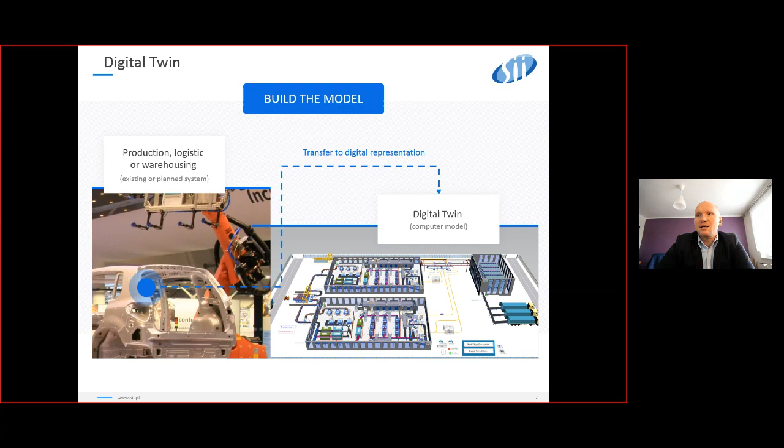What is a digital twin? Digital twin is a computer model which gives us many possibilities and opportunities. It represents an existing factory or plant, including production processes and logistics, or a planned production system in greenfield or brownfield stage. What kind of new possibilities does a digital twin give us?

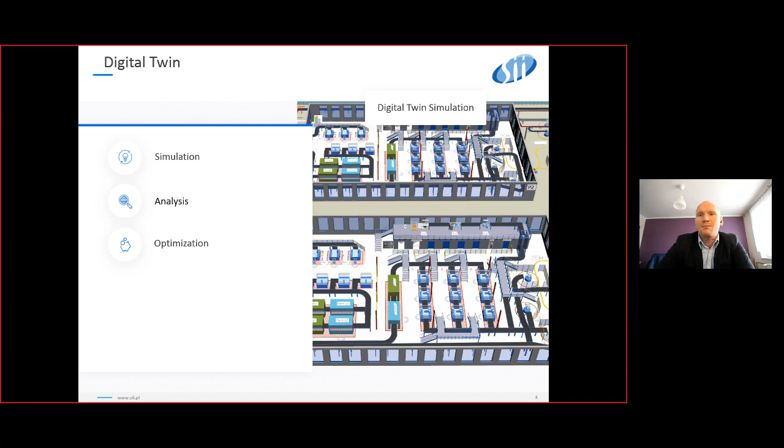Basically, digital twin allows us simulation, and we can make many different scenarios thanks to this. Analysis: we can check the throughput, machine efficiency, and so on. We are able to do optimization with genetic algorithms, for example, or optimization of buffers. We are also able to make nice visualization in 3D or 2D environments. And this is everything in the area of production, logistics, and warehousing.

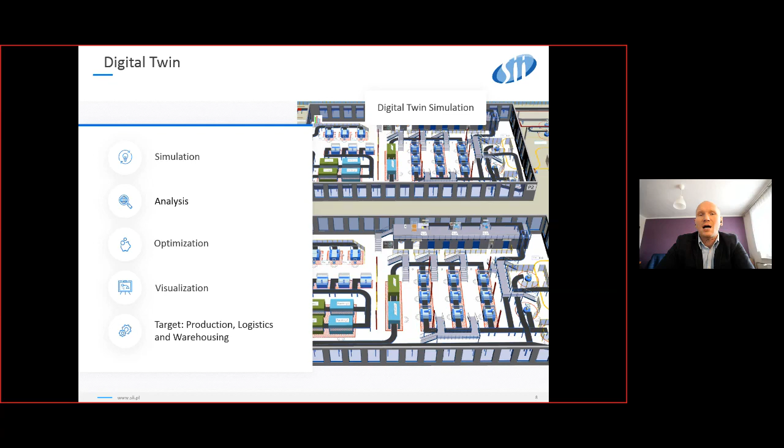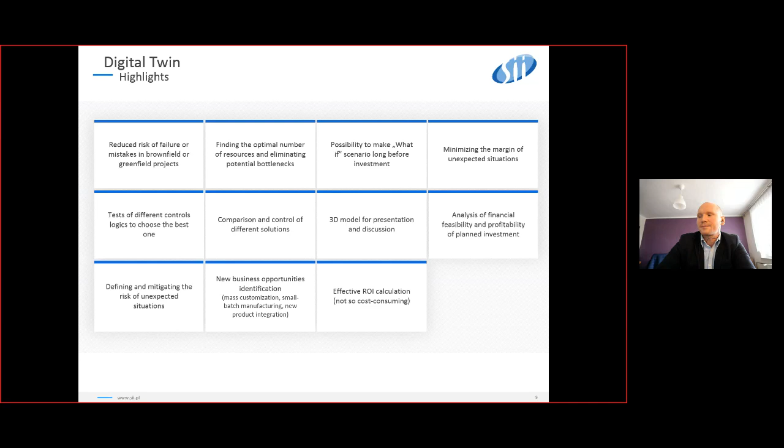Przemek, say a little more about the highlights of the digital twin. Yes, of course, there are lots of different benefits and highlights of digital twin. We've just listed some of them here. Of course, this is not the complete list.

However, we will summarize what we believe is the biggest benefit of digital twin: we are able to make all kinds of analysis based on different kinds of input data. Starting with the most obvious, financial feasibility and profitability of planned investment, all kinds of what-if scenarios, different comparisons of different solutions, products, control logics, and so on.

We can use digital twin as a great tool for minimizing the margin of unexpected situations, as well as mitigating the risk of such situations. And of course, we can make effective return on investment calculation.

However, what is most important is that we can do it before we really put real money on the table and invest a lot into hardware and equipment. And as you will see later in the cases, we can do really great analysis of future investments.

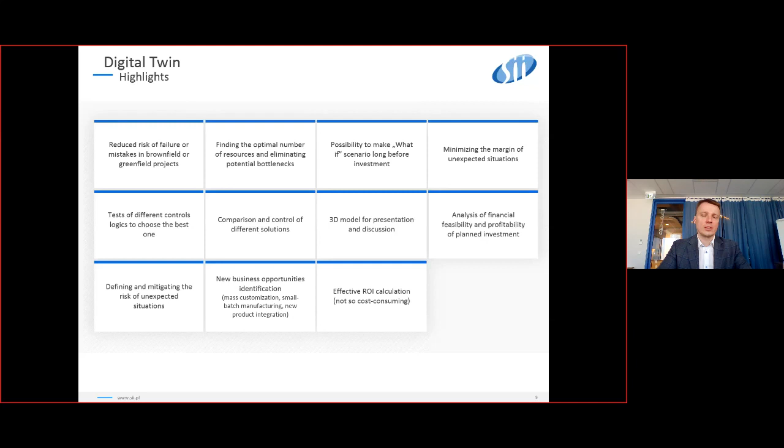So Damian, I give the voice back to you. Thank you, Przemek. So how do we build the model? In the beginning, we need input data. We can collect them for you, or probably you already have that data and can share it with us.

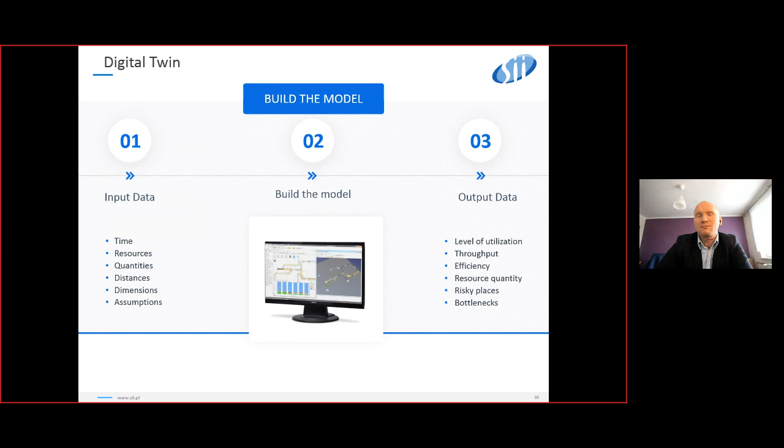If we have input data, then we are ready to build the model, and the model should give us output data, the most interesting KPIs - for example, level of utilization, throughput, or show us where are risky places and bottlenecks. There is much more different benefits, and everything depends on the project and the project goals.

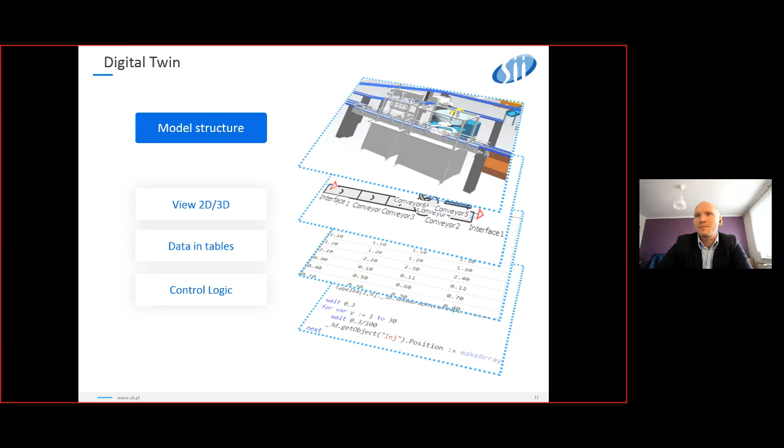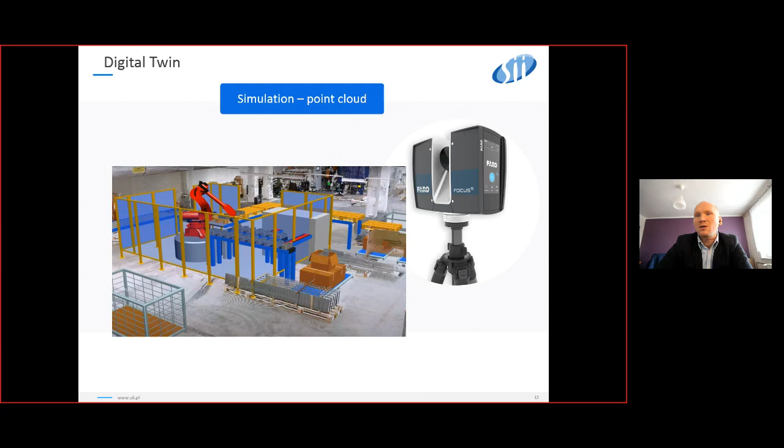We can make simulation in a point cloud if you don't have, for example, a layout or some 3D models. Then we are able to make a 3D dimension point cloud, and in this 3D dimension point cloud make the simulation.

We are also able to create a digital twin for you which will exchange data. It will be possible to import data from databases and send it to some system which may use data from the digital twin. So this data exchange is on two sides.

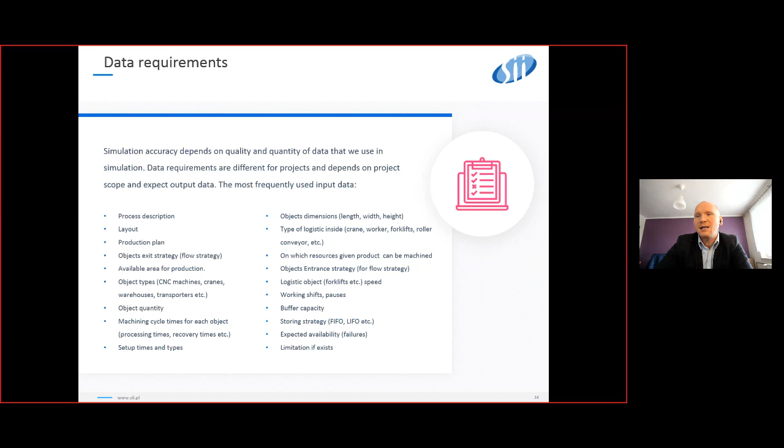Mostly in our projects, we are using input data as you see on the screen. This information is helpful for us in the first stage to make the offer, and after that to make the digital twin for you. You will see some of this data in the next two cases, which I will present for you.

So how does the project implementation look? In the beginning, we need to check your data and make familiarization with your data, learn your processes, check how the process looks. After that, we are ready to prepare an offer for you and make some estimation, and later on prepare the project.

In the end of our project, we will give you the answer for the questions, and we will achieve the goals, and you will be ready to implement those recommendations with a low margin of error.

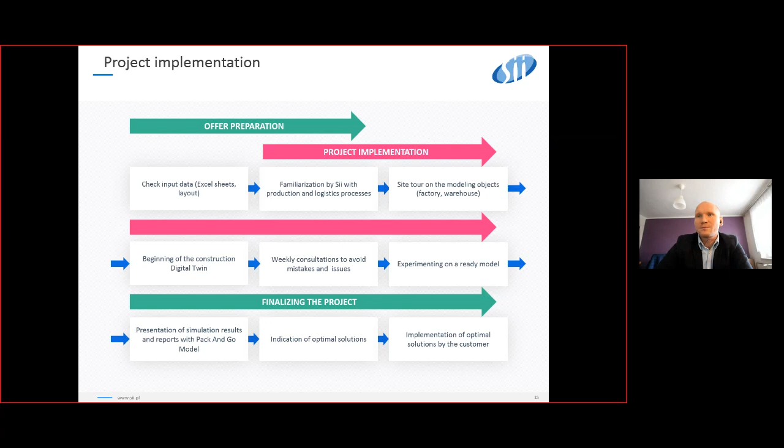Case one, the introduction. Give you, Przemek. Okay, so now we can go to the business case.

The first one we'd like to present is a real life case. It was developed for Kler, one of the biggest furniture manufacturers in Poland. So what was the task?

The task was that there is this factory already operating, and they were planning to change the logistics system in the sewing department. There were several goals defined, and the main one was to compare logistics systems, which I will explain more in a second.

There were some production planning aspects that the customer wanted to analyze. Of course, they wanted to verify different kinds of scenarios, make some experiments according to already simulated data, find the optimal parameters, and recommend the optimal number of devices.

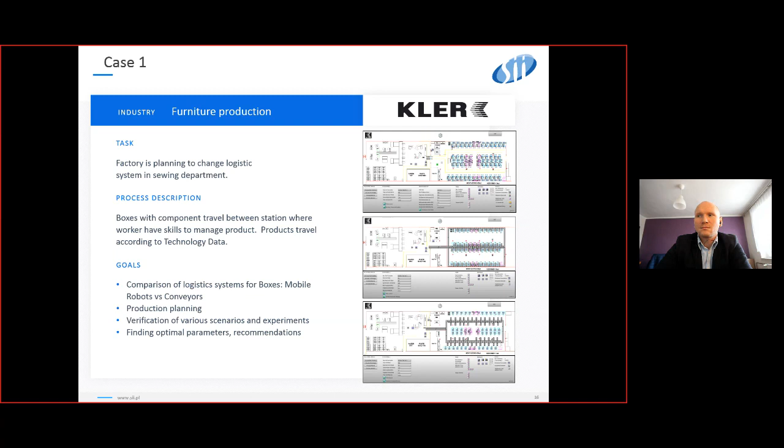The process being analyzed is that product boxes travel between stations where workers have different kinds of skills. This is an important factor because, as you will see during the simulation, the competency matrix was required to be implemented so we would have a realistic simulation of how the workers work.

Also, there was a requirement to integrate technology data. So all the production technology necessary to deliver the products should be input data for the simulation, as well as time scheduling, shift work, and things like that.

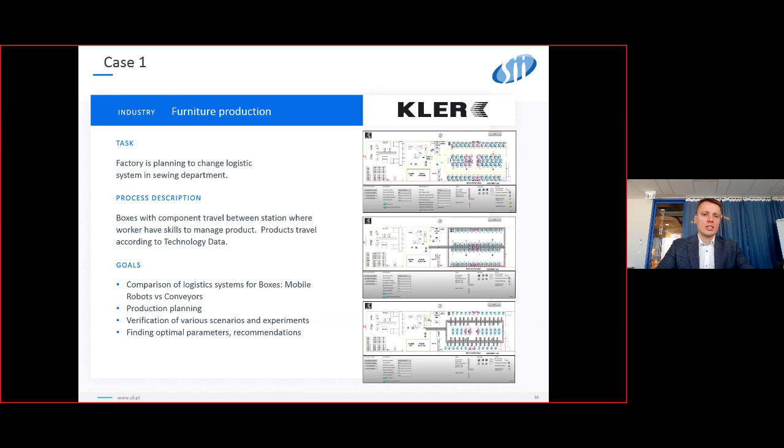So the process and the layout, if we go to the next slide, shows there are material cutting and initial sewing departments where the real process starts, and then the material is transferred to the assembly sewing department and the decorative sewing department.

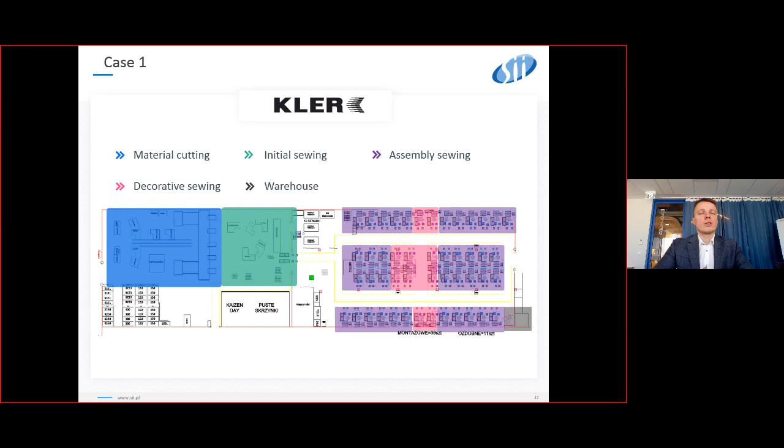As I mentioned, if we go to the next slide, the main goal was to compare three logistics systems. One was based on mobile robots, AGVs, and two others were based on conveyor systems in two different topologies, called Concept 1 and Concept 2.

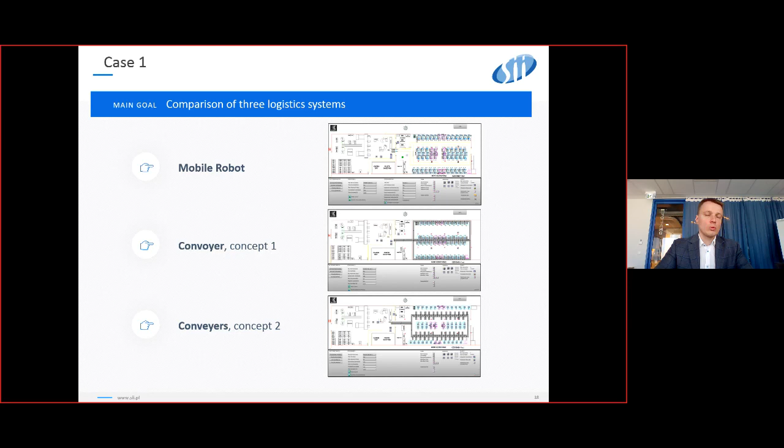So now, Damian, I give you the floor back again to present the simulation. Thank you, Przemek. So now you see the simulation model.

In the bottom of the screen, you see the control part. On the left side, there's a possibility, by clicking the button, to choose input data, which is stored in Excel sheets, but we can also change it and take this data from databases or your systems. In this example, we are based on Excel sheets.

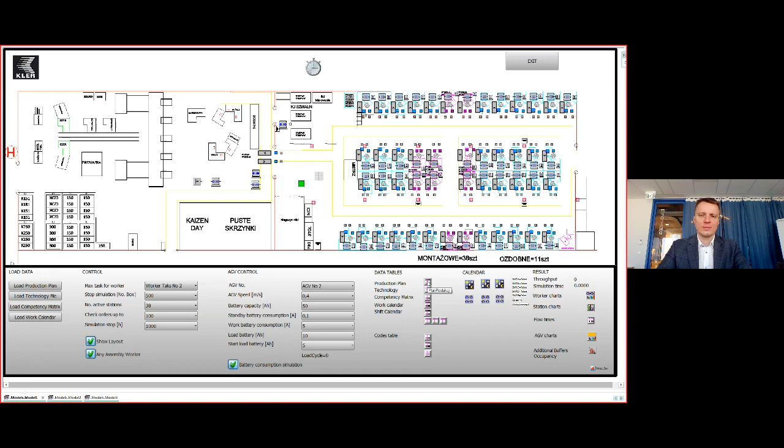After that, we are able to load the production plan, technology file, competency matrix, and shift calendar, and those data are stored in data tables. For example, this is the production plan - one month production plan includes more than 2,000 orders. There is also technology with the routing of the product and the cycle time for the product.

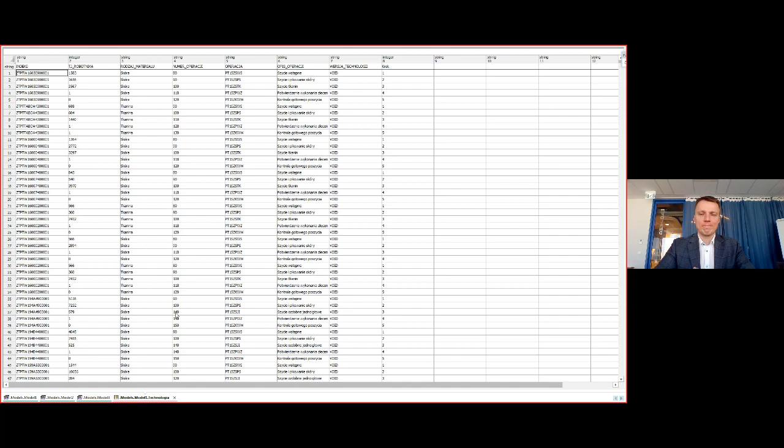There is also the competency matrix, which tells us which worker has which competency. When it's 1, it means the worker has competency to work with some kind of product. So if worker 2 doesn't have a 1 in a cell, it means they cannot handle or manage this product because they don't have the skills to work with it.

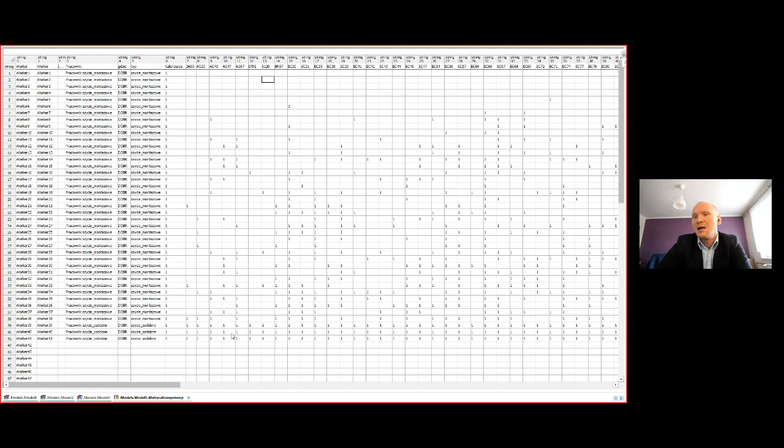At the top, we've got the workers with lower skills. At the bottom, we've got the workers who are most qualified and very flexible. So we start by giving tasks to the workers with lower skill, and after that we go to the bottom of this table.

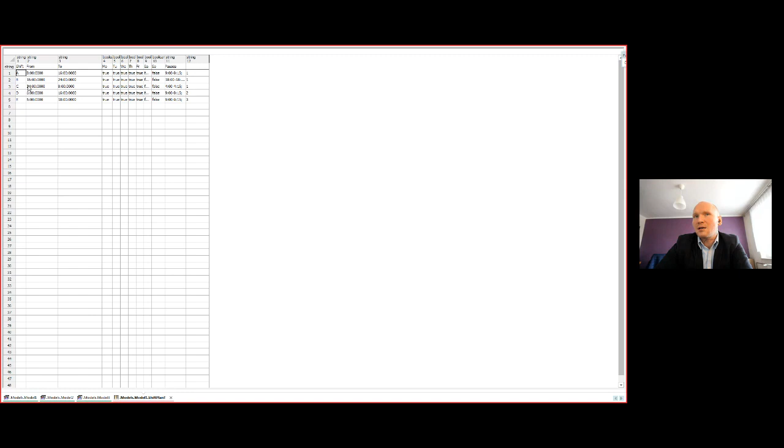We've got some information about the shift calendar, so we can run the simulation in different shifts. It's up to the person making the simulation and experiment to choose which calendar will run.

Besides that, we've got additional options - we can send two orders, for example, to one worker. Of course this is a drop-down list, so it's possible to change it. We can also stop the simulation after a few hundred orders.

We are also able to deactivate some stations. Now we've got 38 of them, but we can choose less than 38. We are checking the orders from the production plan, and we can also change the figure over there.

In this version, we also have the control panel for AGV, where we can choose the number of AGVs, which is very important for us, the average speed, and battery consumption and battery parameters, which we can also change depending on the producer and our assumptions in this area.

The last part of the control panel is results, and the most important for us is throughput and simulation time. Throughput shows how many we produce, and simulation time shows how long it takes to produce the throughput.

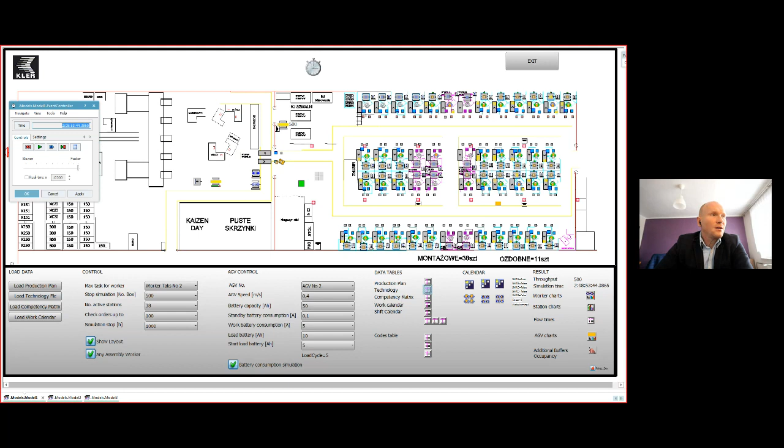I will save it to an Excel sheet to compare this data with other versions of this model.

So now I will run the second version where we have conveyors. I will run it at full speed. And after a while I have the time and the throughput, so I will store it in the Excel sheet.

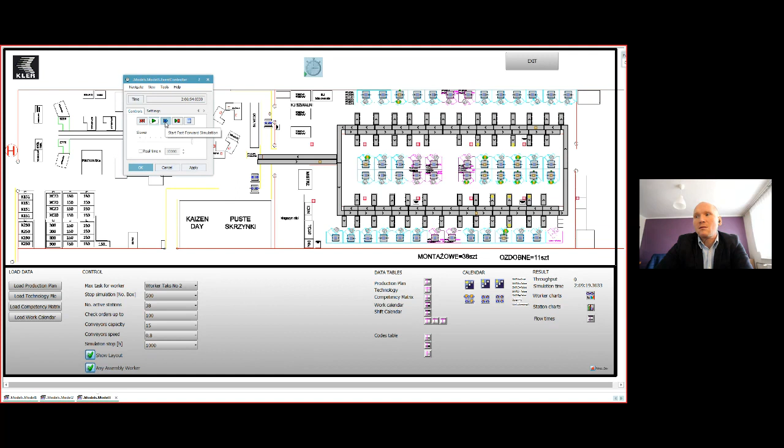And of course I will check the third version. I will run it at full speed. And now I got the result.

So I checked version 1, version 2, and version 3, and here are the results. They are almost the same, but that's because I'm using almost the same input data and almost the same parameters.

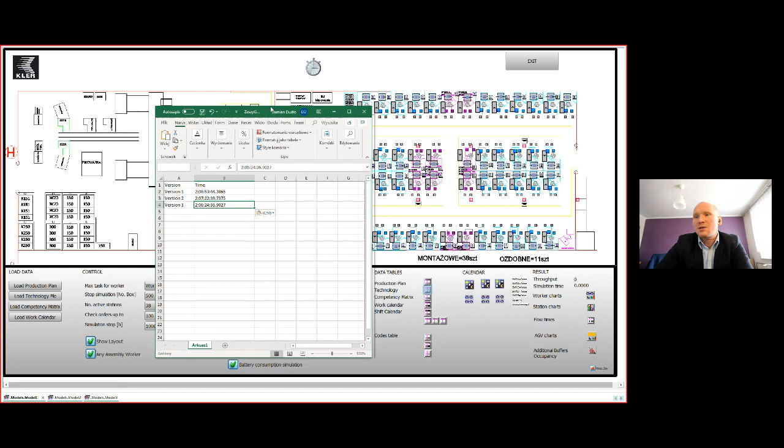So now I'm interested in what will happen if, for example, I change the number of AGVs from 2 to 4. Am I able to produce more thanks to this?

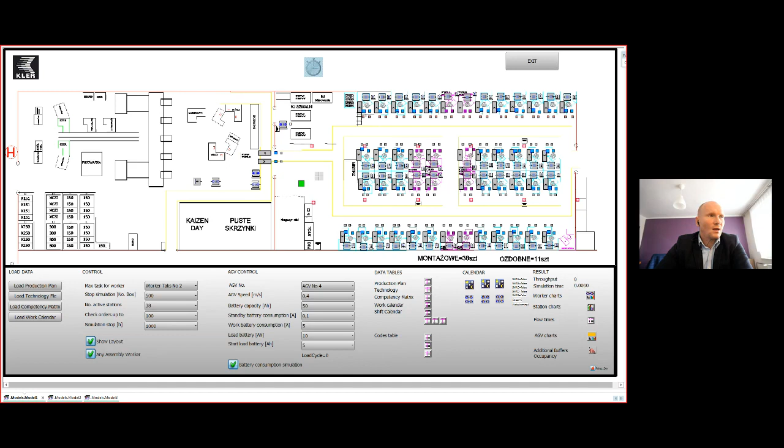So now I'm again turning on the simulation. I lost the clock in my simulation, but it's not a problem at all. I will play the simulation at full speed and we will see the result.

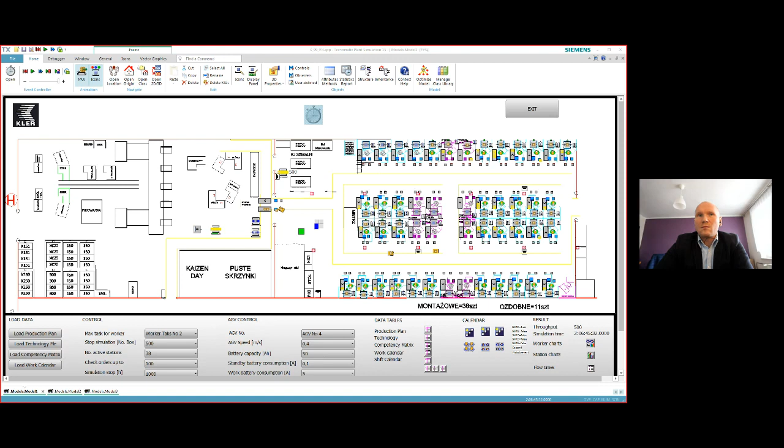Now you see this is my new result with the 4 AGVs. And as you see, I saved 2 hours thanks to the 2 additional AGVs.

There are many different parameters which I'm able to change and check the final results, compare them with other versions, and choose the best solution in my case. I'm also able to load different data and run the simulation again. There are many possibilities and different possible results. I will show you also the chart.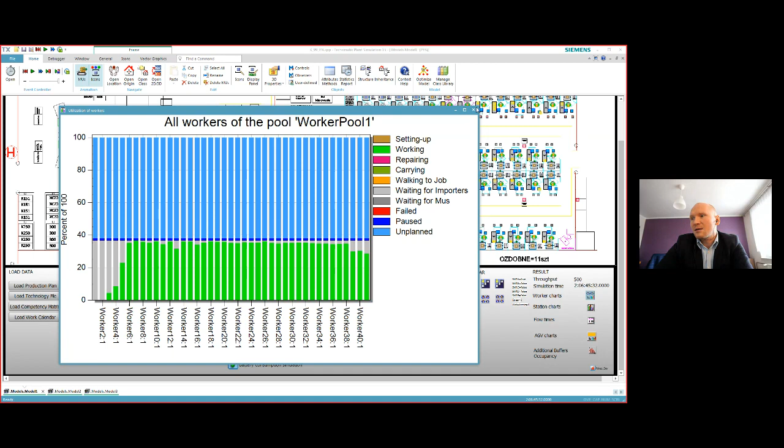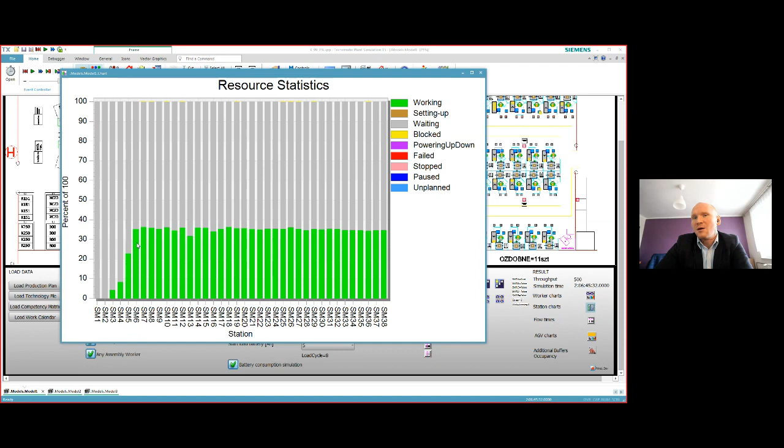More or less the same information I got from the utilization chart for the stations, and here also I see that utilization is lowest for the workers who have the lowest skills.

I can also check the chart for the AGVs. Now I see I have 4 AGVs, so it doesn't make sense to add additional ones because they are waiting for orders, waiting for tasks. So they are not very highly utilized.

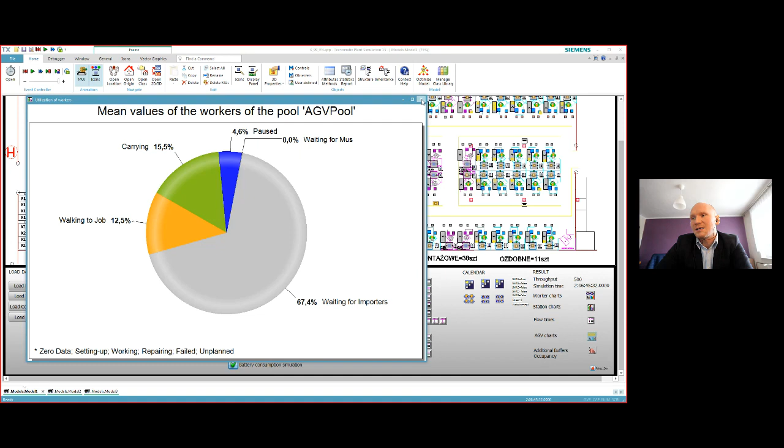In this case, I think this is everything which I would like to present to you. I will go back to the presentation and Przemek will tell you a little bit more about the future steps or possible development in this area.

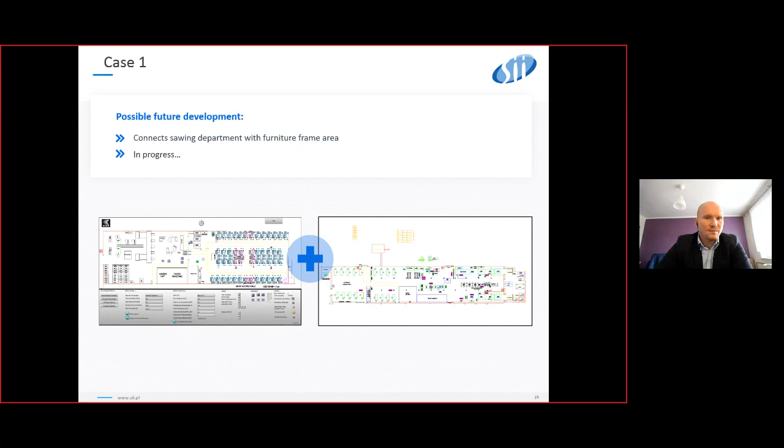Yes, as you see, there were different kinds of requirements on input data, different output data, different kinds of analysis and recommendations, but that's not all. There are some other possible future developments based on this model. One is to extend the simulation to the furniture frame area, where we can make similar analysis - this is step 1. Step 2 could be to integrate those two simulations into one workflow and then make analysis from the big picture of the whole logistics within this factory. So of course, the sky's the limit. The possible future development is only up to what we want to achieve, what our objective is, and what process we would like to analyze.

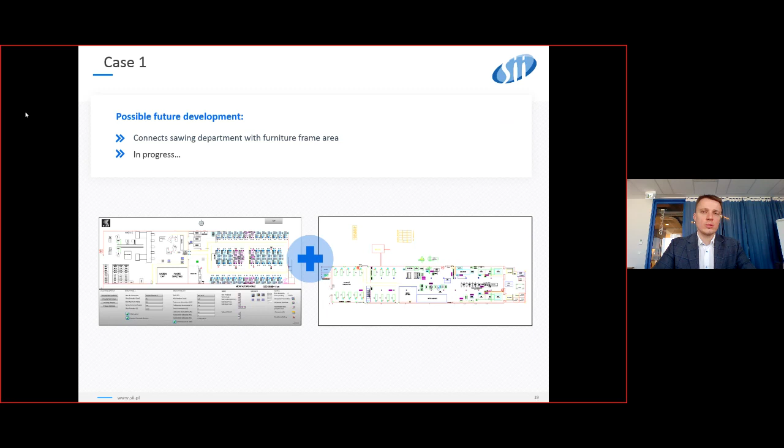So now we can go to the second case that we prepared for you today. This is more from the FMCG industry, a brownfield factory. The case is that there are some new production lines ordered to the factory, and the question management has now is: can the current logistics system manage this new production?

The process we are analyzing here involves some AGVs that are transporting pallets with the ready product from the end of the production lines. There are two destinations where the product is taken: one is the warehouse, and the second is the shipping area where the shipment is made. So the question we have is to find the optimal number of AGVs for the factory and do all experiments that are possible within this model.

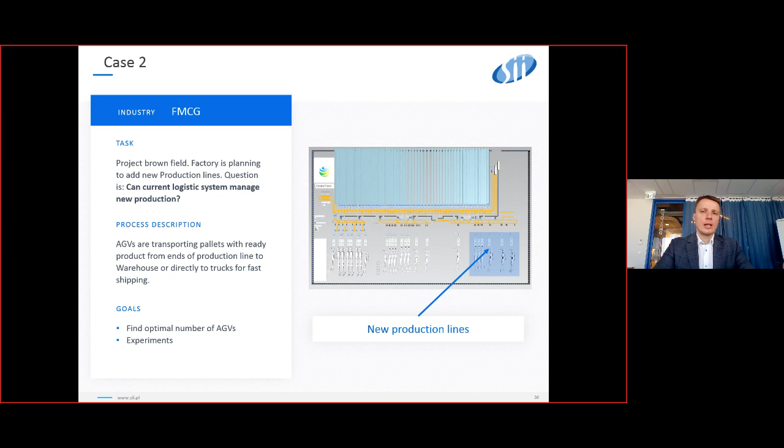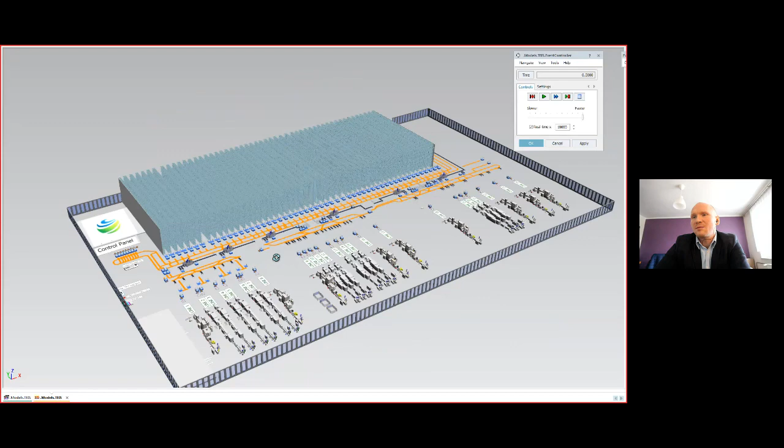So again, Damian, please feel free to show the simulation. Yes, now you see the simulation model - this is a 3D simulation model. I would like to say that each model can have a 3D visualization layer; it's up to the customer what they expect from us. We can prepare a 2D or 3D simulation.

As before, I have a control panel which allows me to change some factors, make adjustments, and set settings. Now I will play the simulation and tell you a little bit more about how it's working. Right now it's running very fast with the visualization - I will slow down a little bit.

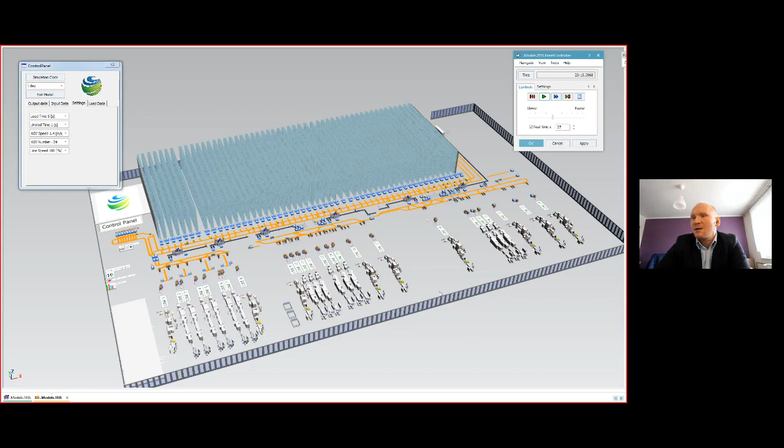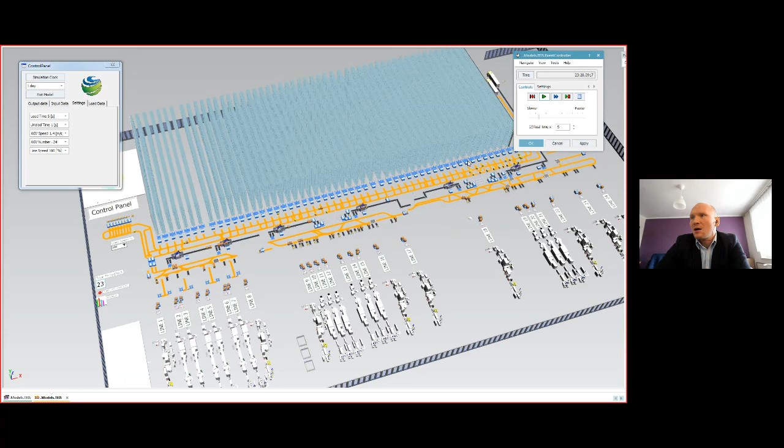Here are the AGVs, the small ones. They are taking the pallets after the stretching and after the labeling process. They are going with those pallets to the warehouse, or going with the pallets with the ready product to the shipping area to load them on trucks and deliver them to the customer. The small AGVs also deliver empty pallets to the lines, making those movements from this area to all of the lines.

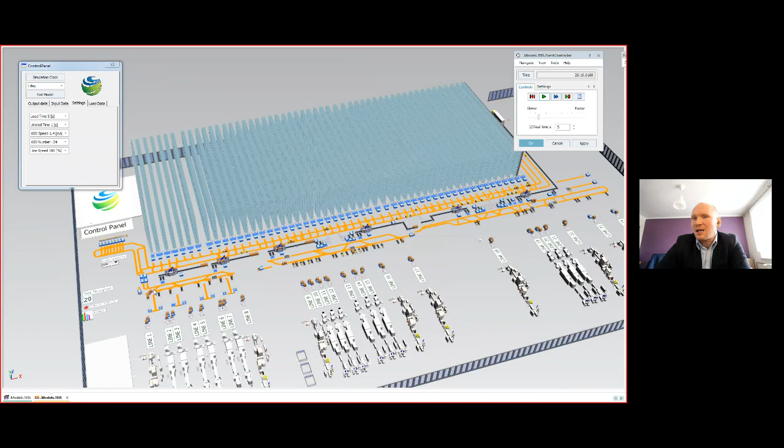In this line, we have the mobile platforms, which take care of the logistic processes from the end of the line to the place where we do the stretching and labeling for the pallets.

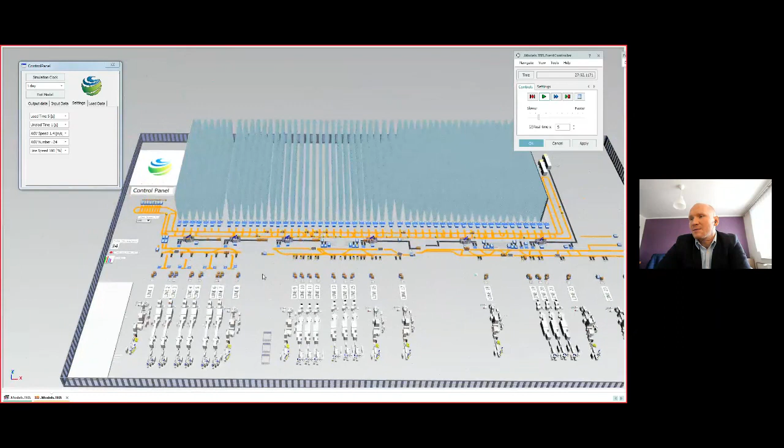And now the question is: if we add some additional lines, or if we increase the throughput for the production line, can we manage these changes with the current logistics system, or do we have to make some kind of investment? And how much do we have to invest? That means how many additional AGVs do we need, or how many additional mobile platforms do we need, to handle the logistic processes in this area.

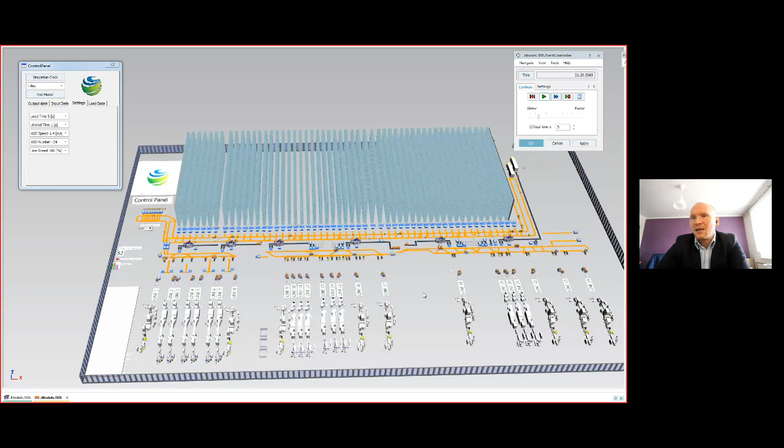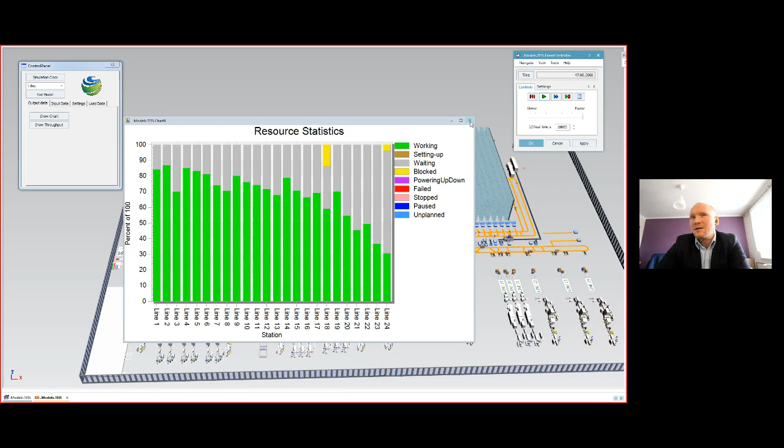I will go back to the presentation for a second and show some charts like this one. We see that we just started the simulation and it should move a little bit, meaning we just started and the process is stabilizing at the moment. We can also check different data in tables.

We already made some analysis because it takes some time to do it, so I'll go back to the presentation and show you what we checked. According to this data on the left side of this presentation page, we made the simulation and checked the small AGV number, how much we are using, and what the throughput is. We see in the middle of this table that it doesn't make sense to increase the number of AGVs because we won't reach any more throughput - it will just stop somewhere around experiment 7, where we have 16 or 17 AGVs. It won't rise anymore, even though the throughput could be lower.

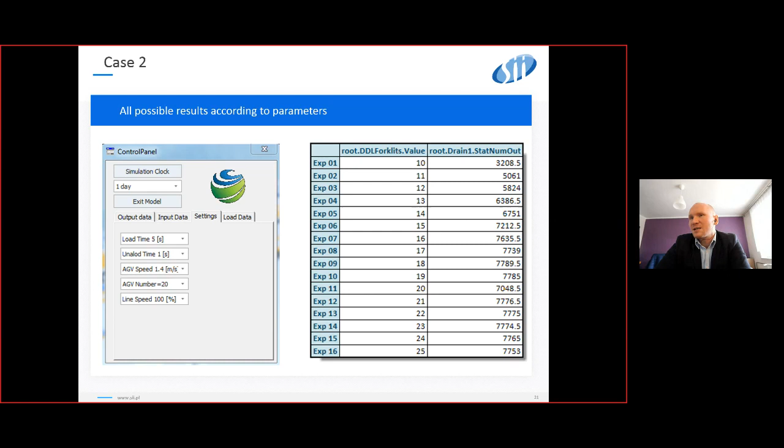We do additional investigation. We check the utilization chart for simulation with the line efficiency at 100%, and now you see this chart. When the color is yellow, it means that line is blocked, meaning this line is not operating well with the logistics.

So logistics is not coming on time to take the ready pallet and deliver it to the storage area or to shipping. The line is blocked. If we increase the throughput for the line by 20%, to 120%, then we see that this effect is even bigger, so we have to focus more on those lines for optimization.

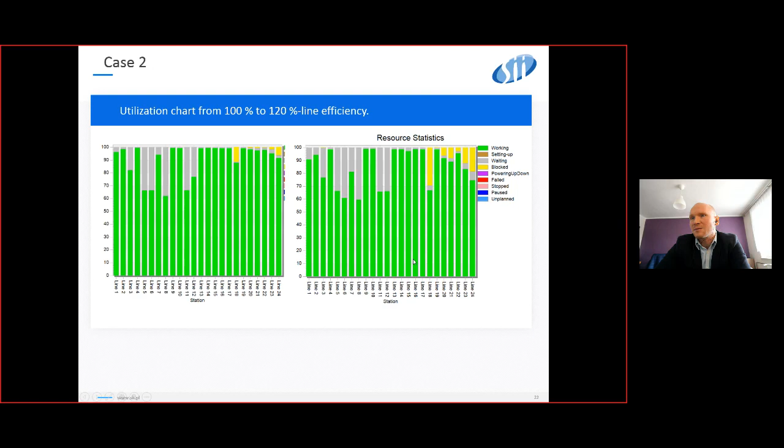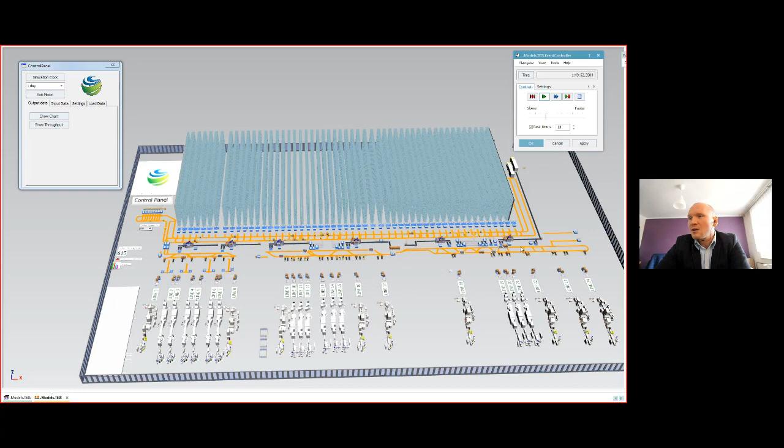In the next step, we change the number of the small AGVs, and we see that the impact after this change is minimal, so this doesn't have any positive effect. We start the investigation and discover it doesn't make sense to change AGVs in this part of the layout because they are not the bottleneck.

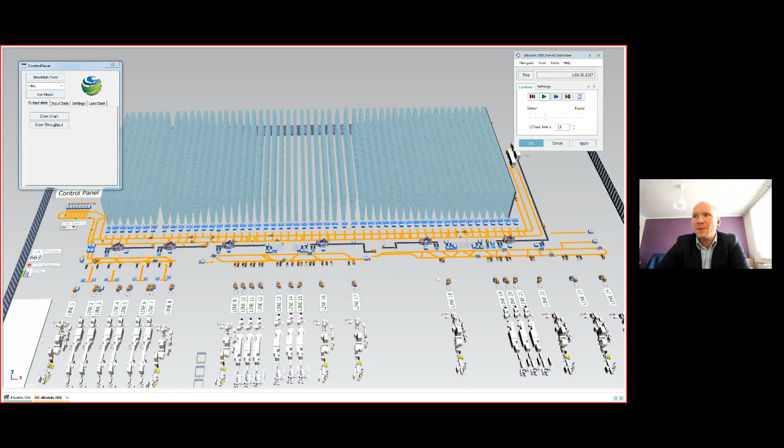The bottleneck is over there where you have the gray platform which delivers pallets from the end of the production line to the stretch wrap machine. We made some tests and discovered we need to add an additional platform there to reach higher throughput. So besides the 22 small AGVs, we got one big platform, and we see that gives us a positive effect.

Of course we continue this analysis, and we finally found the correct number of AGVs, and the number depends on the expected level of efficiency for the production line, but it takes some time.

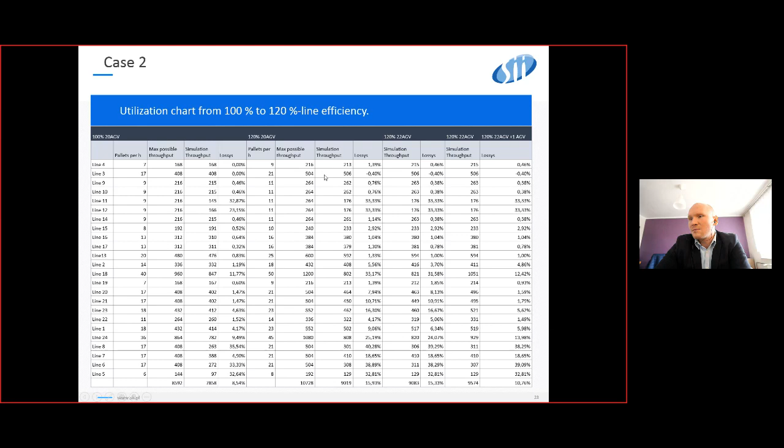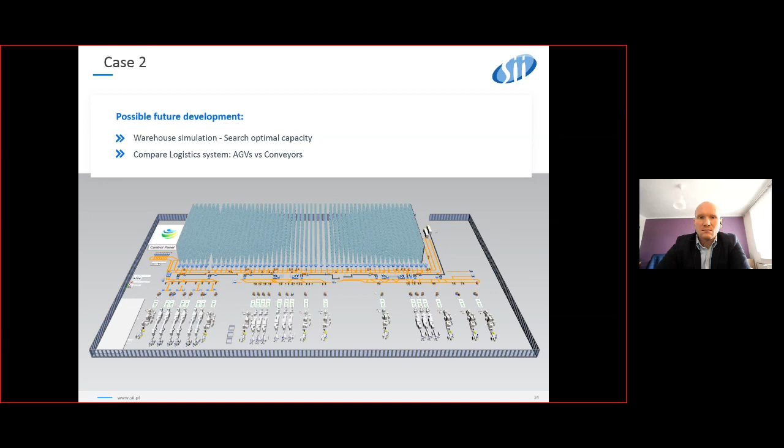As you see in this case too, the first and basic question was the number of AGVs, and as Damian already described, it showed that this was not the only problem. The problem was also that we found a bottleneck in a completely different area than we previously thought the problem was.

So you see there are many different opportunities to explore. However, there's of course a lot of possible future development, because we can add to the existing simulation the warehouse simulation and search for the optimal capacity there. And of course we can try to switch from an AGV system into conveyor systems, and so on. I hope those two cases are useful, the cases we prepared for you today.

Just to summarize, what's important when you start your journey with digital twin into the smart factory is that you have to always think about your objective. You have to well define it, very precisely, what you want to achieve.

And you have to select and find the right process for analysis that is related to the objective. If you keep this structure, then not only will you achieve one of your objectives, but you can also in parallel make additional analysis and experiments, and you can develop everything all the time.